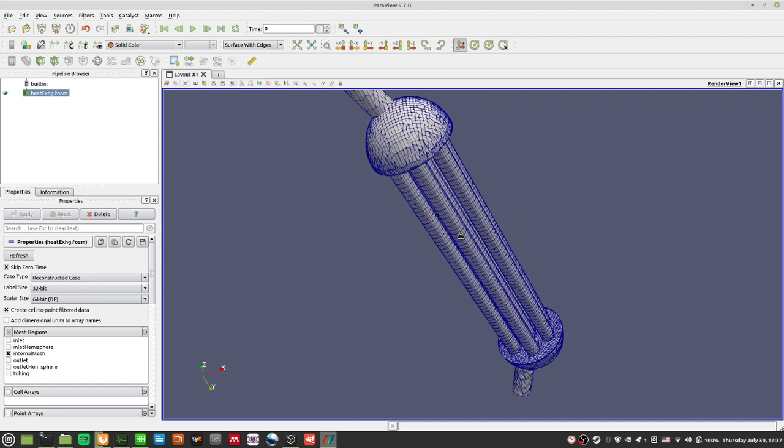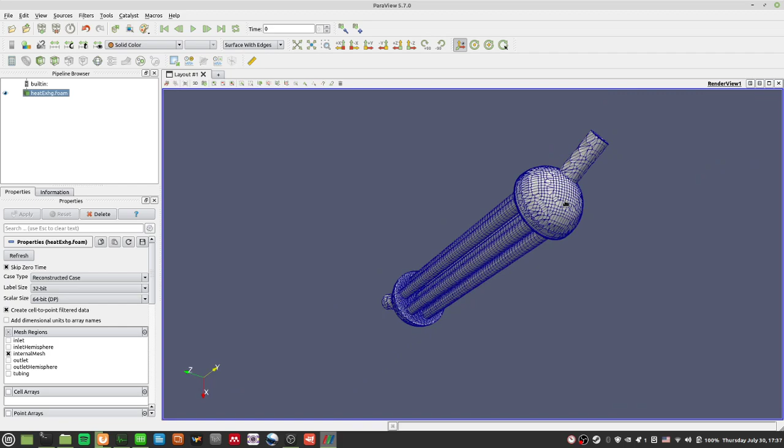Remember last video we were trying to do this heat exchanger shape, and now I have a case set up in OpenFOAM which uses this shape, using Snappy Hex Mesh. The mesh isn't perfect, but it's decent, it holds the shape. There are some rough edges at the side. But generally speaking, the way we would construct this case from scratch is very similar to the pipe case.

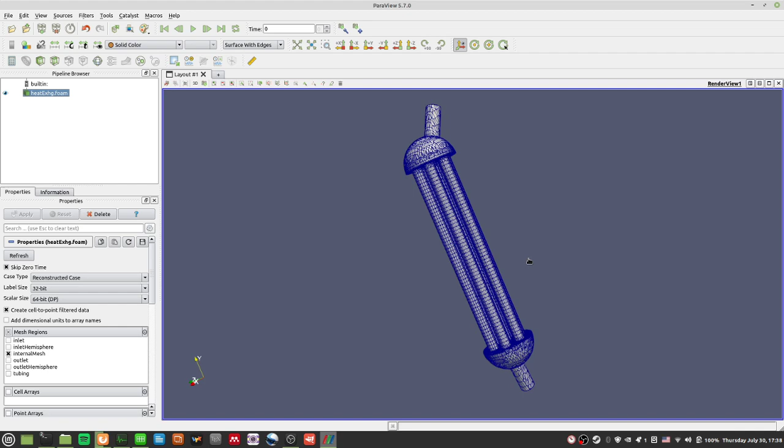Of course, this is actually more challenging than the pipe case because the shape is more complex, and in fact I ran into some issues trying to mesh it with Snappy Hex Mesh and using the PolyDual Mesh utility. However, somehow it's running now. This case is running, I don't know if it's stable, I hope it is.

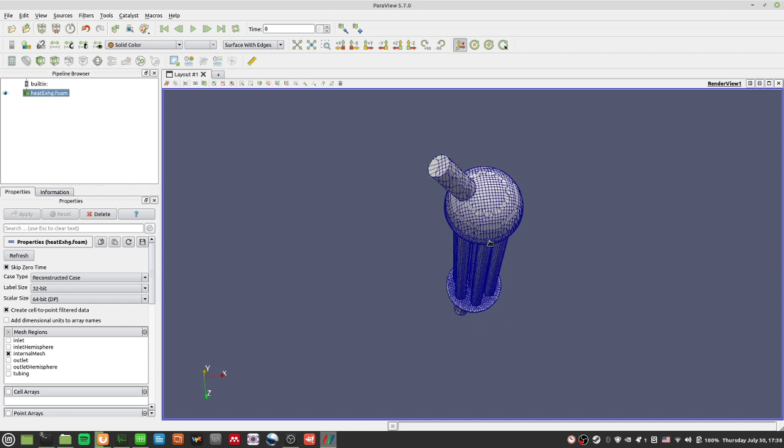The basic setup of the case can be quite straightforward. It's a bit tedious nonetheless, but it's nothing too different from what we are used to. We can try to set up the case as what you are seeing here, and set up the mesh. We'll talk about the boundary conditions and everything.

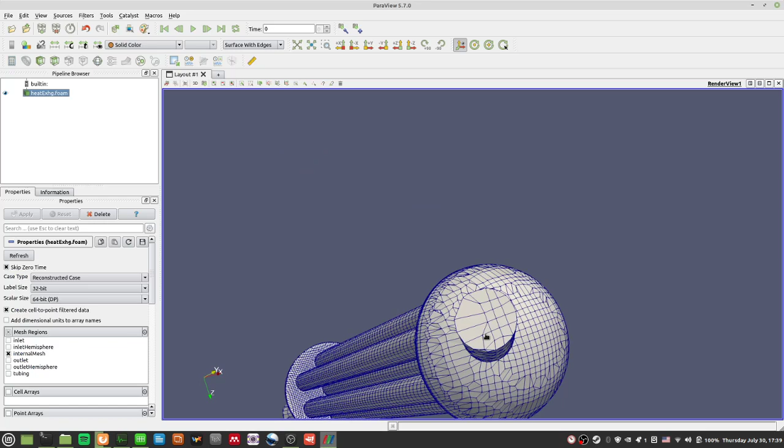And one very interesting thing is when you see this mesh, this pipe's inlet is not exactly facing the x-axis, y-axis, or z-axis, which means when we start to try and define our boundary conditions, we try...

Let's cd to here. When we try to do our boundary conditions, I'm going to just go to a random PimpleFoam file, for example this one. I go to 0 original, I go to U, and you see normally where we'll have our boundary condition like so. We'll have this, for example, the inlet patch will be some fixed value, and the value you'll have to type in the velocity vector, the x, y, and z coordinates. Now that could be very...

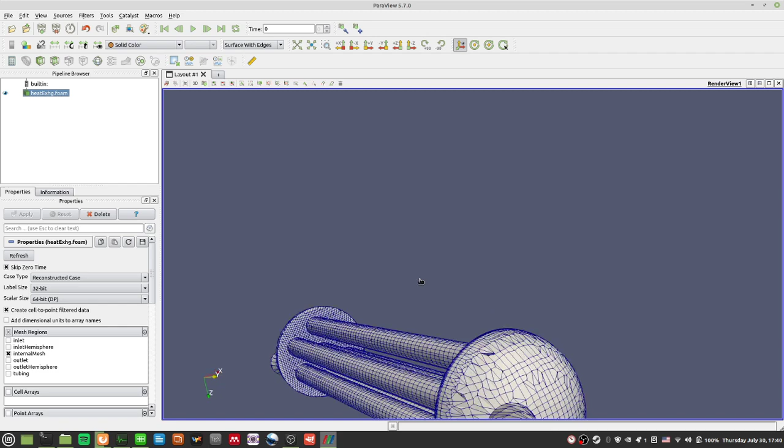Troublesome, especially when this is really off center, as you can see it's really off center. So you might want to prescribe another boundary condition just for this. So the boundary condition I would like to go with is this flow rate inlet velocity patch. As you can see here, there's no need to define any sort of boundary condition - you don't have to select the velocity vector, the x, y, and z coordinate - but instead you prescribe a volumetric flow rate, and OpenFOAM will do the rest for you.

So that's the one I would go with, and I kind of want to demonstrate that. I have this case running, I still hope it's working, but I'm at least going to show you how to set up such a case. I don't know whether it's blowing up, my timestep is getting smaller and smaller, but at the very least, I'll show you roughly how to set it up so you can play with it and stabilize it yourself.

Alright, so I have a template file. This template file is okay, I can just do an all clean here. Alright, all clean. Oh, by the way - okay never mind, I'll just do that later.

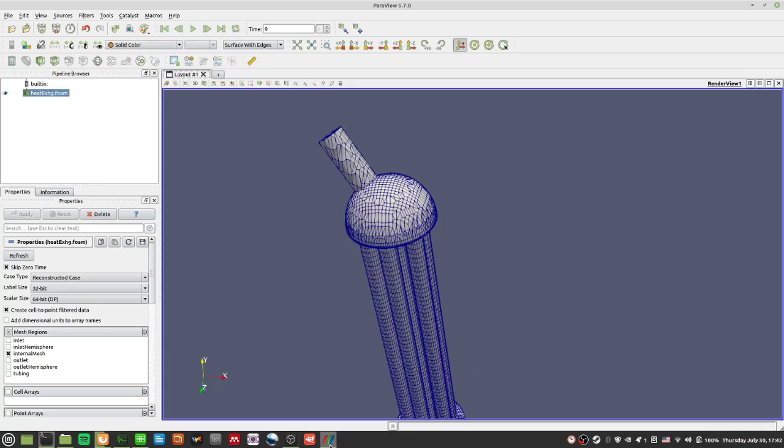So this case is the one I had with the tri-surface with a cylinder, and then you have this extended feature edge mesh, all of this is around. Alright, so all clean does not really get rid of this extended feature edge mesh, so that's nice. What we need to do instead - what we are doing now is to roughly try and convert this standard pipe case into something that includes this geometry a little bit, and we'll try and move it from there.

Alright, otherwise the other way is to just make the mesh bigger. It usually helps with the stability for some reason. Okay, so anyway, let's start by doing this.

We copy this template file into heat exchanger video tutorial. Okay, I'll just demonstrate this. So, heat exchanger video tutorial, and here is our mesh, so to speak.

Okay, first thing first, I want to copy over all the important files. Actually, what I've done in this Git folder is include interesting shapes for you to play with, so you can play with your cases.

One is the crude S-shaped pipe that I was talking about a few videos back. One is this heat exchanger here, and I can copy all of this and put it in our Snappy Hex Mesh and FreeCAD cases. This is the one I'm putting it in because we have all these complex shapes which are much harder to do than just a simple pipe, because we have to deal with FreeCAD and the meshing, and that's going to be harder.

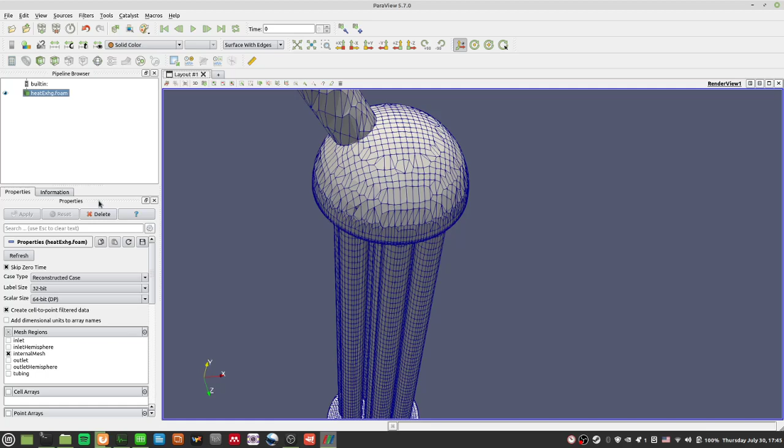Okay, first thing first, I'm gonna delete this, and maybe let me check this. Okay, yeah, this doesn't look good. The time step is getting smaller and smaller because I'm adjusting it for the Courant number. Apparently that's not working very well.

But anyway, let's go through how to set up the case file. You can play with the stability part later by changing the mesh and everything. Let's go to...

The heat exchanger tutorial. I'm going to Tri-Surface, and I'm going to just put the full heat exchanger object. So this is the full thing, the Tri-Surface file. And first thing I'm going to run is a block mesh.

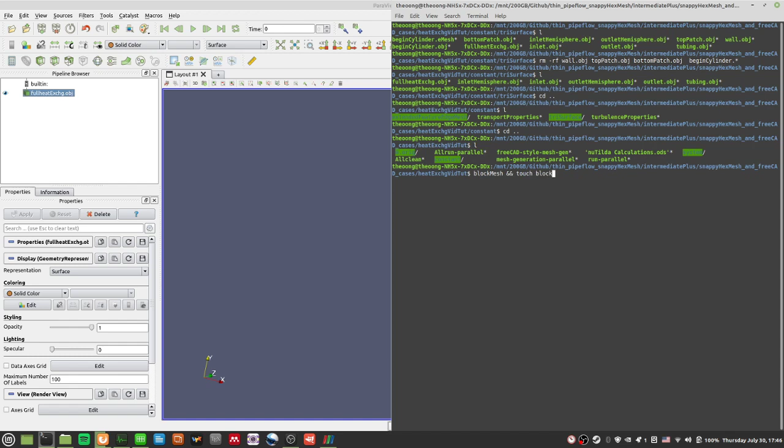Why run block mesh? I'm running block mesh so that I can compare the size of this file. So I'm going to run block mesh and touch block.foam, so I can open this up in ParaView. Now once I see that, I can roughly see where the blocks are oriented.

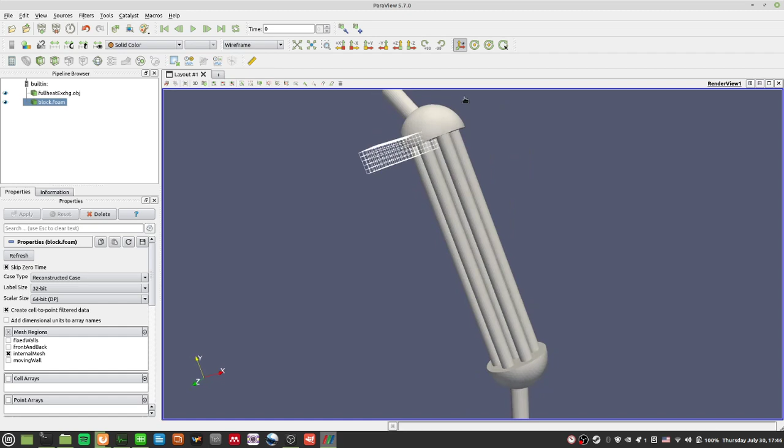So here you can see the blocks are not oriented very well. You can see the wireframe. Alright, a few things you can do. Let me start by making this block mesh bigger, because it's obviously way too small.

Let's see. Yeah, okay, this block mesh is actually way too small. So what can we do? We can change the block mesh dictionary.

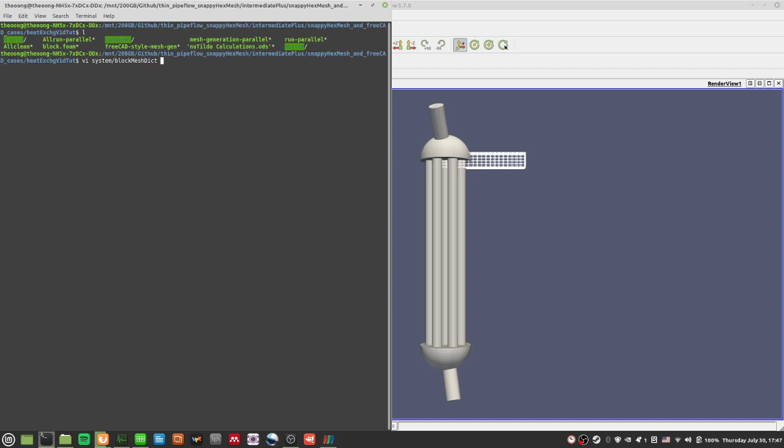So I'm going to get out of this, and I want to change directory to the same folder, heat exchanger video tutorial. Let's vi system block mesh dict. Okay, so I can increase the scale, and I run block mesh again.

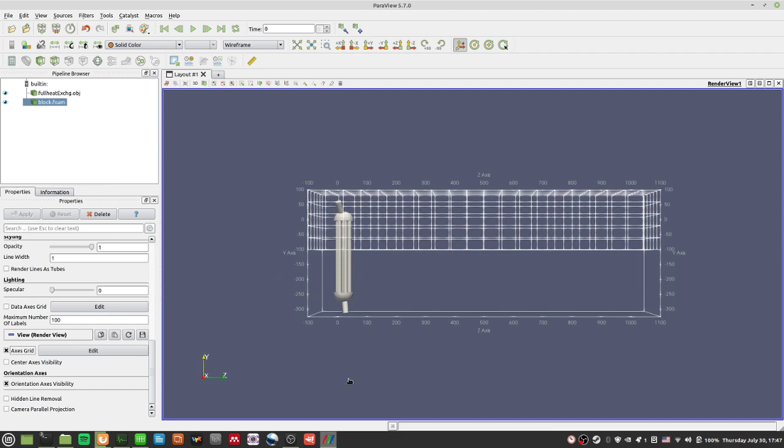Alright, and let's reload by pressing F5. So now this thing is way bigger, but a bit too big. In fact, in this Z direction it's a little bit too big. So I can turn on the axis grid to see how big my block mesh should be.

Alright, ideally I want it to go from minus 100 to 100, that's in the Z direction. So let's change the Z coordinate so we can do it one at a time.

Okay, so I'll change all of this to 1, because the scale is 100, right? The scale is 100, so minus 1 to 11 actually is minus 100 to 1100, as you're seeing over here. It multiplies by 100. So I'm not going to do that, I will have minus 1 to 1.

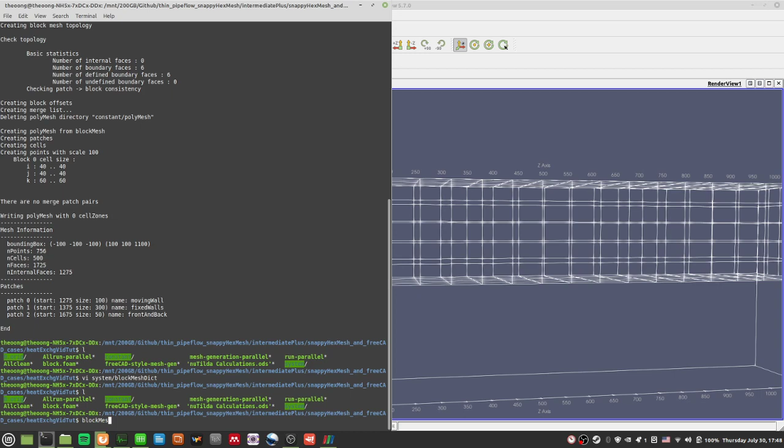So let's do block mesh again, and we'll just press F5 here to reload. Okay, so it's much smaller. This is what we want.

However, I think it's a little bit too fine in the Z direction. I don't want the block mesh to be so fine, as you can see here. So let's do that, system block mesh dict. Let's put in the Z direction, I just want 5 points.

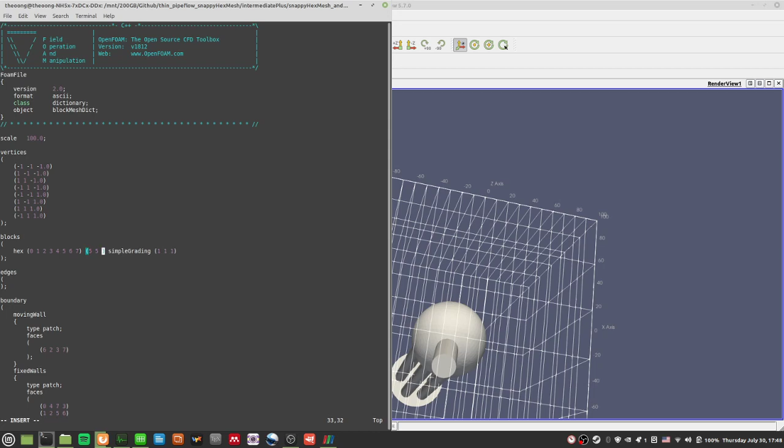5 points. Okay, and of course in the Y direction, I want the minimum Y coordinate to go to minus 400. Can you see here? It's at minus 100 now. Okay, it's minus 100 now, but I want it to go to minus 400.

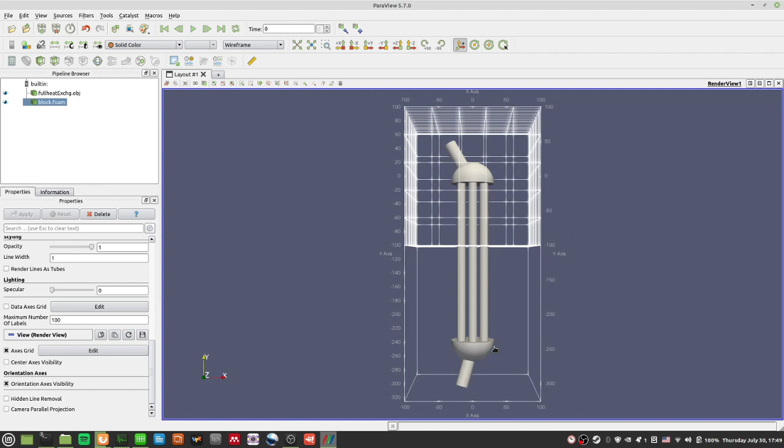So let's change that. Two things I want to change: the number of grids in the Z direction, number of cells. Then I also want to change this Y direction, not to minus 1 anymore, but to minus 4, so that this will be minus 400, the minimum Y coordinate.

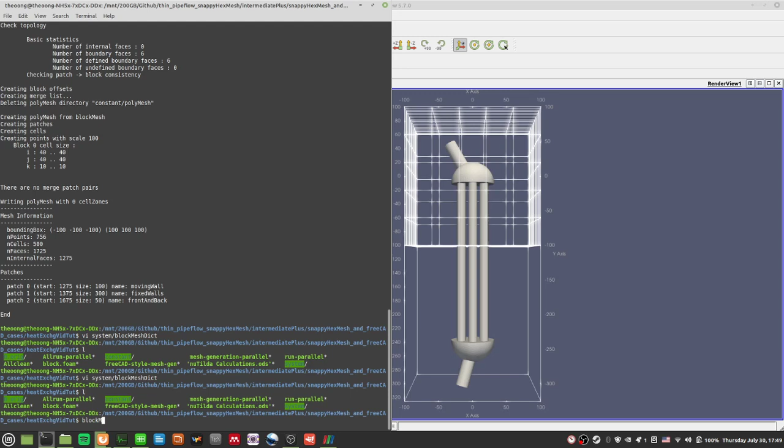Let's do block mesh again, and we'll just reload, and there you are. Everything is covered nicely now, so we can move on to Snappy Hex Mesh.

Okay, Snappy Hex Mesh. Alright, let's clear both windows. Snappy Hex Mesh dictionary—as you can see, I have to change all of these object files.

As you can see, it's a little bit tedious. Not only do I have to do this, I also have to change this extended feature edge mesh, because that's what I was using to do the objects there. So you can see it's a bit tedious.

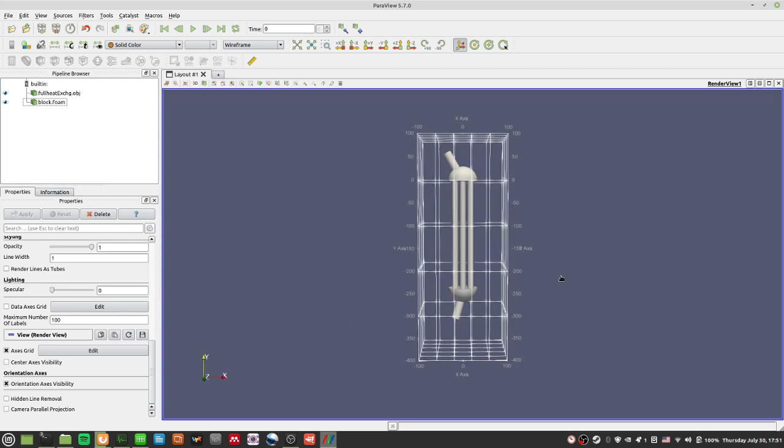So if you are going for bigger and bigger files, it may be worthwhile learning another software such as Salome, where you have a GUI, a graphical user interface, and that's exactly what I am downloading at this point. Salome—OpenFOAM, and then you'll see the Salome platform. It's a very popular request, I've seen in the comments. I was initially a bit reluctant to learn it, because I thought Snappy Hex Mesh can do everything, but as you can see, Snappy Hex Mesh gets fairly tedious once you have much more complicated shapes, and that can be quite a headache for us to run.

So with that aside, let's start by changing these object files. I want to have this full heat exchanger object, so I'm just going to import everything here.

So you see, changing these things one at a time. Inlet—okay, inlet, I'll save, and then I have an outlet. Okay, so a few more. I'll need to paste maybe this too, and maybe I'll not type it again, I'll just copy and paste. It's much easier.

Okay, so let's do inlet hemisphere and outlet hemisphere, and then there was one more called tubing, so let's do that.

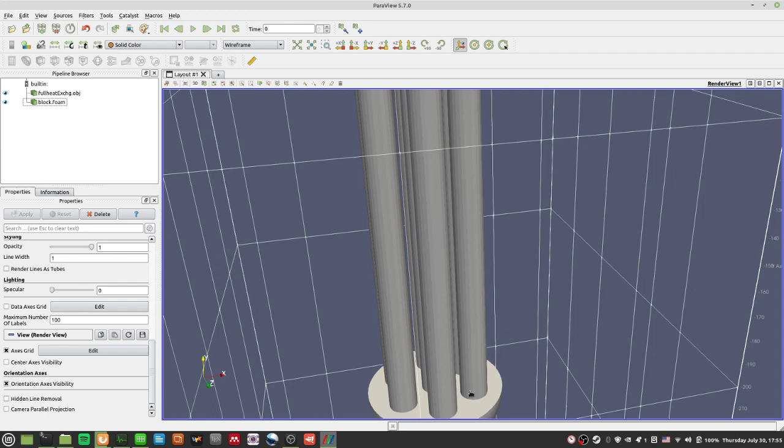What do we do? Yes, okay, we'll try to—you know where this is? This is actually where your edges are, between the pipe and this boundary, this surface here. All these sharp edges tend to need a little bit more refinement, so I'll just give it a little more refinement over here. I'll give it a level 5 here, okay, in case we need it.

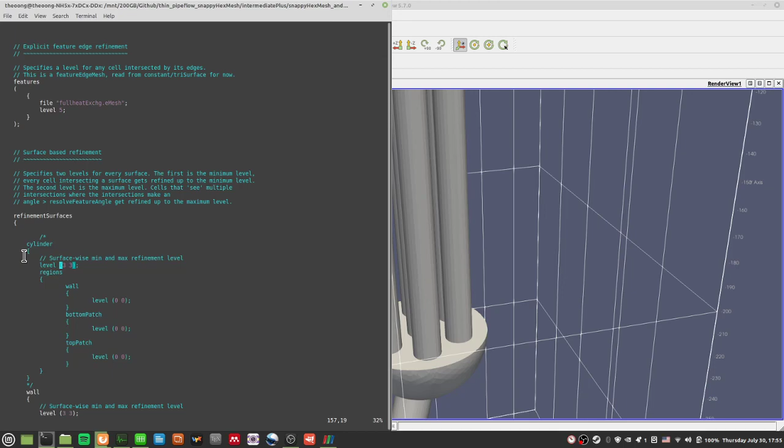Alright, so I'm going to leave this cylinder file here as an example, but I'm going to need to type everything again.

So instead of wall, I'll be using... I want to include several patches here. So what I'll do is use this method. I have the tubing, the inlet hemisphere, and the outlet hemisphere. So I want to try and sort this thing out.

I want to try and type it this way so it's easier—I don't have to keep typing so many times. So this is basically for the tubing, inlet hemisphere, and outlet hemisphere. I will have this sort of patch assignment, and the rest I'll just have an inlet and outlet.

I hope this works for Snappy Hex Mesh. If it does, it will save a lot of time and effort. So outlet is here, and the rest don't really need to touch unless you know what you're doing.

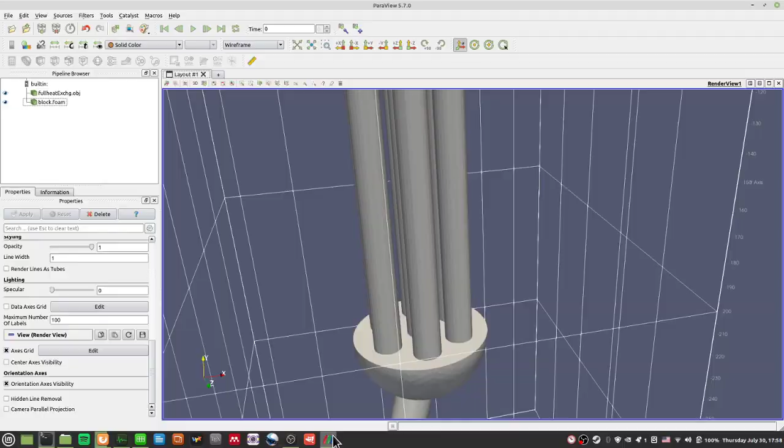So let me touch Snappy. I can use the block.foam to do that. Let's do block.foam and I'll press F5. This is the castellated mesh step because I didn't write the overwrite. So let's put the next step—what do you call that—next step is...

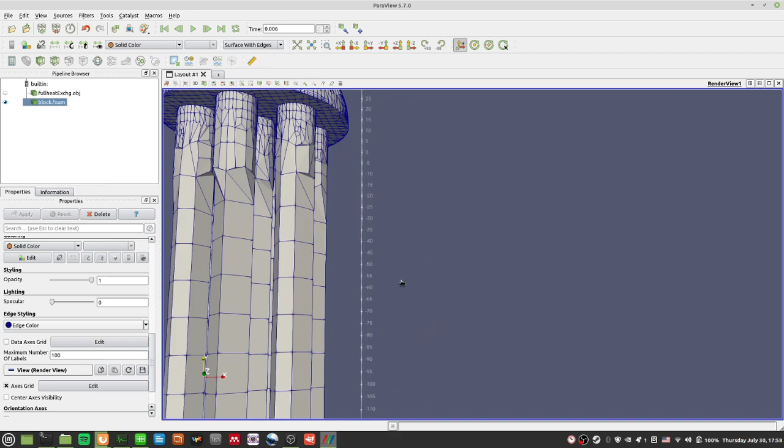What's the castellated mesh—as you can see, near the edges, the features are refined pretty nicely. But the pipes are really coarsely refined, a little too coarse. Maybe I should change it to a level 4 refinement. So I'm going to try changing it to a level 4 refinement.

So this is probably what you do in your Snappy Hex Mesh workflow: system, Snappy Hex Mesh dictionary. Let's change it to a level 4 refinement. Surprisingly, I did not need to change this location-in-mesh point. But if it works, it works—I'm not complaining that it doesn't work.

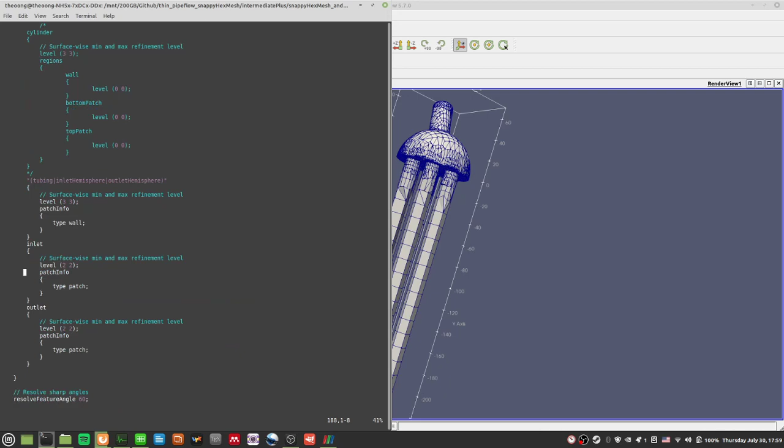Normally you would have to specify a point within this mesh, telling OpenFOAM or Snappy Hex Mesh that you want to keep this part as the inside, and then delete the other parts. Since that was not necessary, I won't go through that part—it just happens to work. If not, you'd have to test roughly where the meshes are.

Let's get a level 4 refinement for... and I'm almost out of time. So I'll delete all that.

Now I'll run Snappy Hex Mesh one more time. It should take longer, so I'm just going to check these results and call it a day, so to speak.

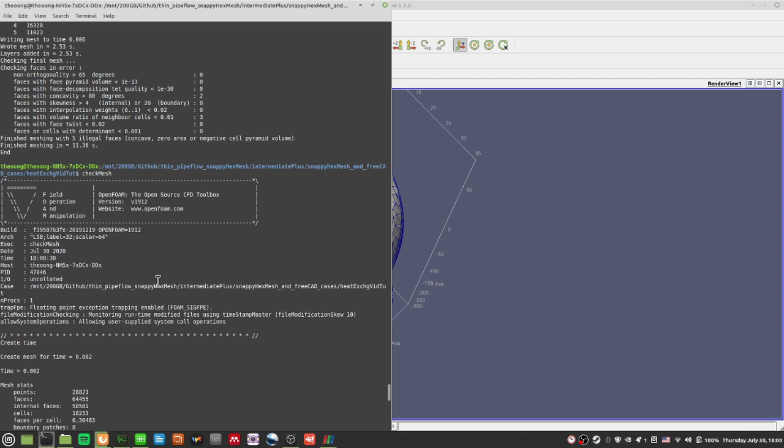I hope this is working, and of course, check mesh—I actually failed the mesh check. But alright, let's try anyway, we'll deal with it in the future. You can see that at least the pipes in the middle are more well behaved and well shaped. So not too bad, but not the best, since there are some illegal faces, as you can see here.

That's the thing about going to Snappy Hex Mesh—it's like flying blind. You can't really see what's going on, it's all in command line. You can only see when you go to ParaView. So there may be some advantages to getting familiar with Salome. The workflow is pretty simple, but that's another story for another time.